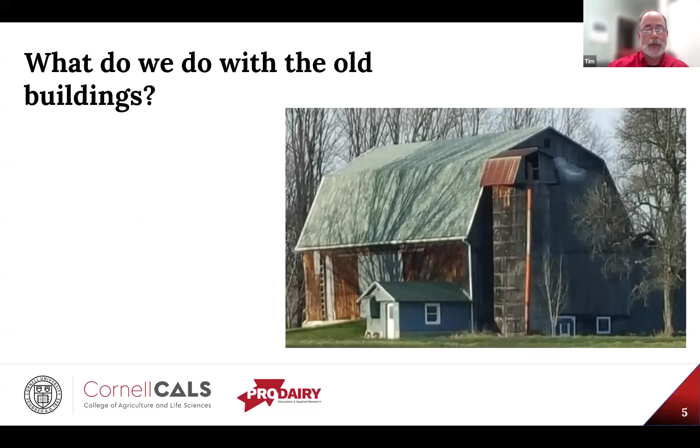Jay Harmon at Iowa State University said it best, and we're talking transition housing. The ultimate goal is to provide a positive environment that promotes the welfare of the sows while providing good animal flow to keep animals and people safe, the ability to observe animals, and provide these aspects in an economical manner.

Now, when we talk about old buildings, what can we do with them? Well, of course, we can raze it - has it outlived its useful life? Is it time to just salvage what we can and put it to rest? This is probably the most drastic choice, but also might be an issue of safety. If the barn has not been cared for properly, it could be a ticking time bomb just waiting for the next windstorm or heavy snowfall.

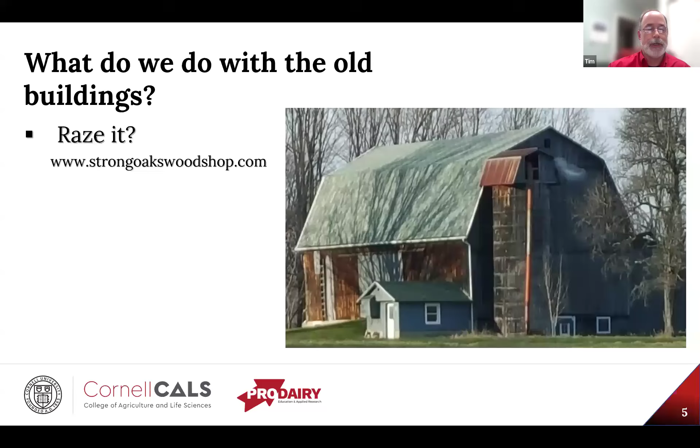Now, if that's the case, there are companies that will buy these - I don't know what they'll pay for them - but they take these old barns down and turn them into coffee tables, bar stools, headboards, you name it. And that might be an option. This is just one example here. I know there are several companies out there. I'm not endorsing any one in particular, just this was an example.

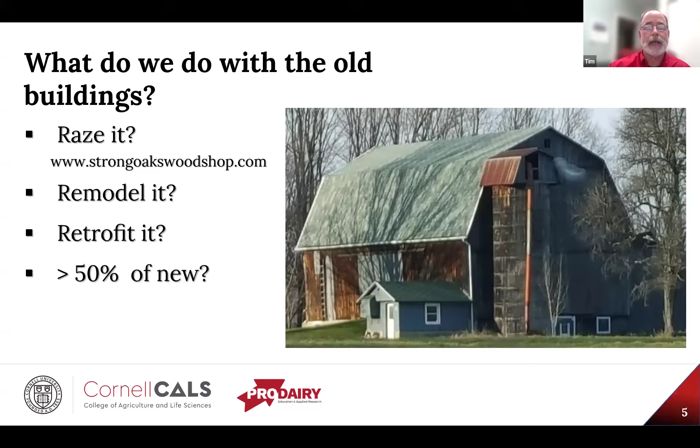Or we can remodel it, which is kind of what we'll be talking about today - upgrade it and be able to use it for a hog operation. We can retrofit it a little bit, update it, upgrade it, and make it more usable for what we want to do. Just remember, if it's about 50%, if it's more than 50% of the cost of building a new one, think long and hard about that. Now, granted, that's kind of a guideline, but if it's more than 50% of what a new one would cost, maybe you want to look more towards the new.

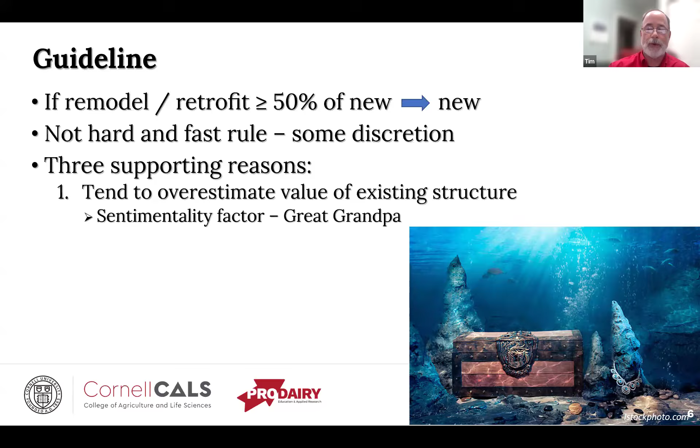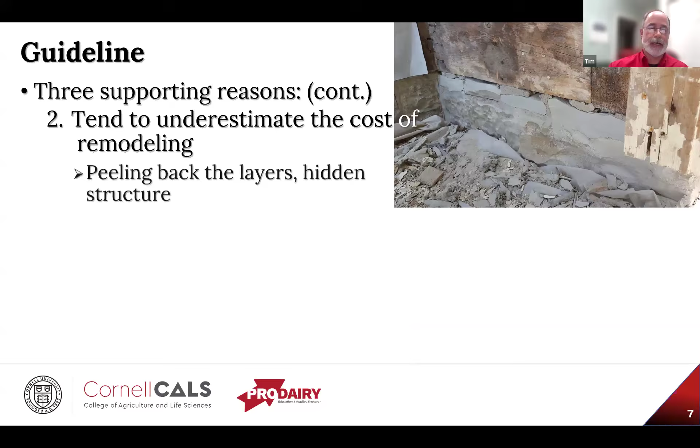Now, that's not a hard and fast rule, and there is some discretion involved. But there are three reasons that support that. The first one is we tend to overestimate the value of the existing structure. Now, granted, there's almost always the sentimentality factor, and it can be very hard to walk away from, let alone raze the building great grandpa constructed with his own two hands from the raw materials he found on site. However, we really need to see this as sunk capital, just as if it was sitting on the bottom of the ocean. It's gone, it's unrecoverable, and throwing more money after it is not a wise use of resources.

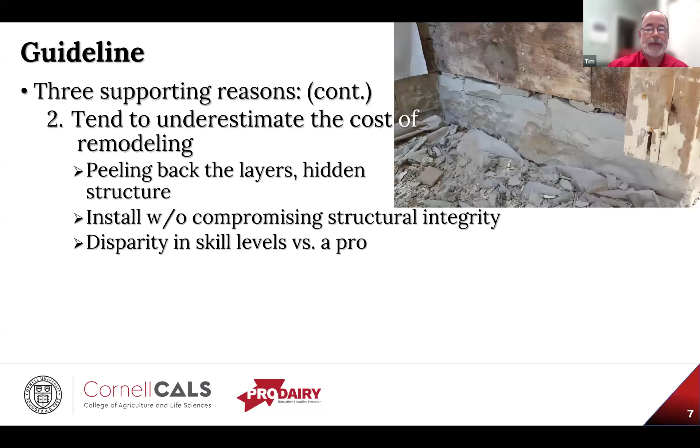Reason number two is we tend to underestimate the cost of remodeling. It's not until we start peeling back the layers that we see the hidden structure, or what may be left of it, and we may not be able to install any new systems without compromising the structural integrity of the facility.

Many may feel they can reduce expenditures by doing it themselves, but they fail to consider the disparity in skill levels between themselves and the guys who do this for a living. Then there's the amount of tinkering required to retrofit 21st century technology into a 19th century structure, and if you're from Eastern New York or New England, that can be an 18th century structure you're dealing with. Then there's the availability of the necessary tools and materials, some of which are required for these new technologies.

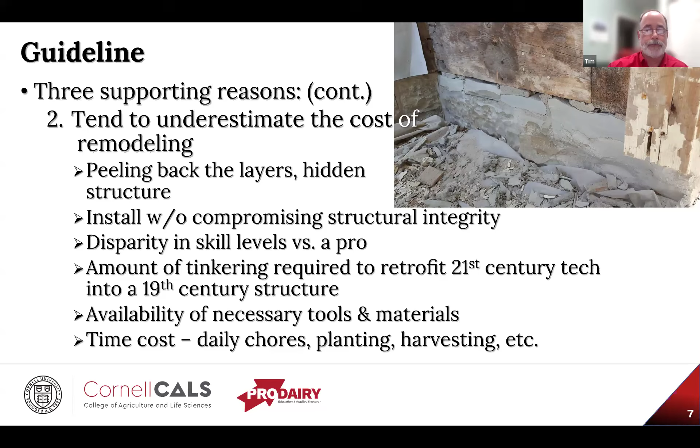If you have to buy a $4,000 piece of equipment just to make all the plumbing connections, and you only have 20 of them to make, it's hard to justify that cost. Whereas a professional is doing this job plus six other jobs, and he can easily spread that cost out over several units. Then, of course, there's the time cost. As the farmer, the best use of your time and talent is doing the daily chores, planting, harvesting, etc., not necessarily swinging a hammer or spinning a wrench.

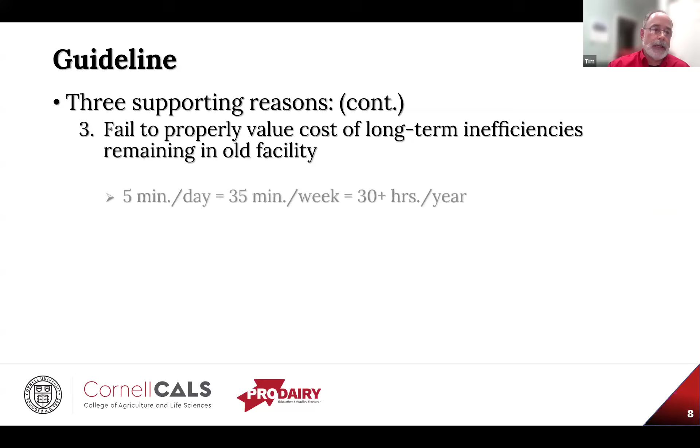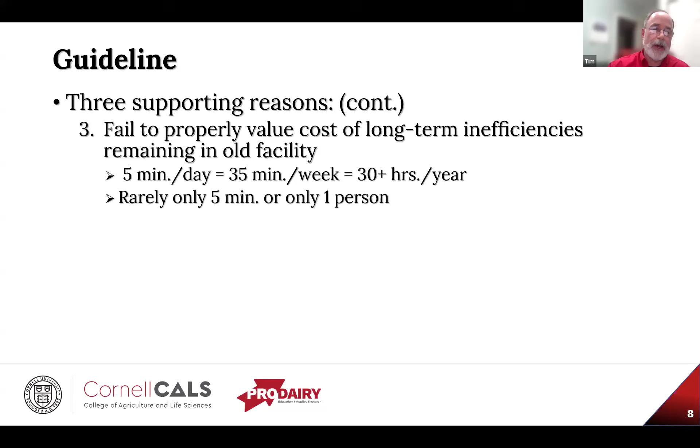The third reason is we tend to fail to properly value the cost of the long-term inefficiencies that are going to remain in the old facility. There's only so much you can do with some of these older buildings. You might argue it's only 5 minutes a day, but that's also 35 minutes per week and about 30 hours per year, almost a full work week, or at least half of one. But rarely is it only 5 minutes or only one person.

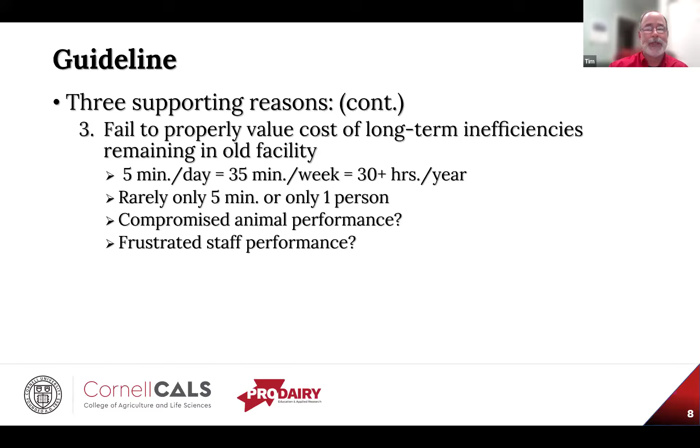Then what about compromised animal performance, where we just can't get the growth out of them we want because there's always somebody with a sniffle, or one section of the barn where the animals just don't do well. As long as we still have that building, you're always going to have that issue. And what about frustrated staff performance? The poor person working in there has hit that low milk line just one time too many, and they'll let you know about it.

So those are the three issues. But the all-important question before we do anything is, how do you want to manage? That must be answered before any designing begins.

For example, stalls: do we want free access, non-gated, or large open pens? How about feeding? Are we going to use feed drops, trickle feed, floor feed, or some electronic feeding, especially with the sows as they start to come into their milk? Then watering - is this going to be water tubs, water troughs, trickle feeders? What are we going to do?

And waste management, how are we going to move the manure in and out of the barn and then out to the field? And how about animal movement? Anytime you move animals, that's a good time to take some measurements on them - what we call KPIs, or key performance indices.

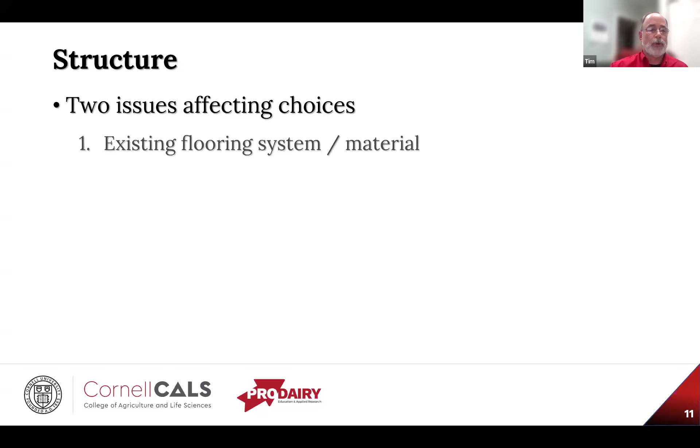Are these pigs growing like we want them to? Are they doubling or tripling their weight from birth to weaning? Once they move from a feeder group to a finish group, what is their weight gain? Try to figure out how we can do this safely and quietly without upsetting the animals, and get the data we actually need, because the goal is to efficiently and effectively use what you have available to arrive at a good system at an economical cost.

So let's talk about structures. There are two issues affecting choices here, and the first is, what is the existing flooring system or material? Well, it could be earthen, which obviously is not recommended, because pigs like to dig.

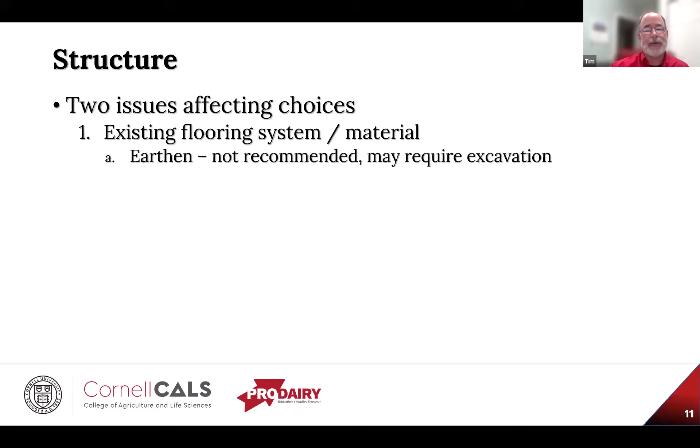That's just a pig being a pig, you can't fault them for being a pig, they just like to dig. And if there's an earthen floor, they're going to be digging everything everywhere and may even upset the foundation that is there. And if this was an old dairy barn, it may have been a run-in shed where they just had heifers or dry cows, and there may be 1.5 to 2 feet of manure in there, and we're going to have to excavate down to some virgin soil before we can do anything else.

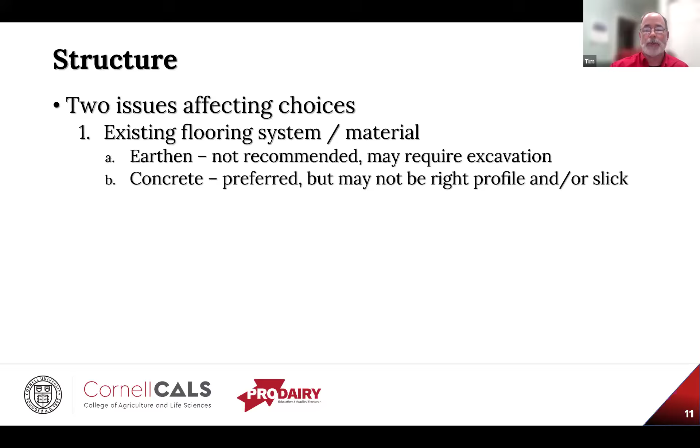Then if it's concrete, that's preferred. But again, this is an old dairy barn, so it might not be the right profile. You may have gutters in there, you may have mangers, things that you really don't need. And the concrete could be very slick, especially if they've been scraping it with a back blade or a skid loader, which can really put a polish on that concrete. That's really the last thing you want when you're moving animals around.

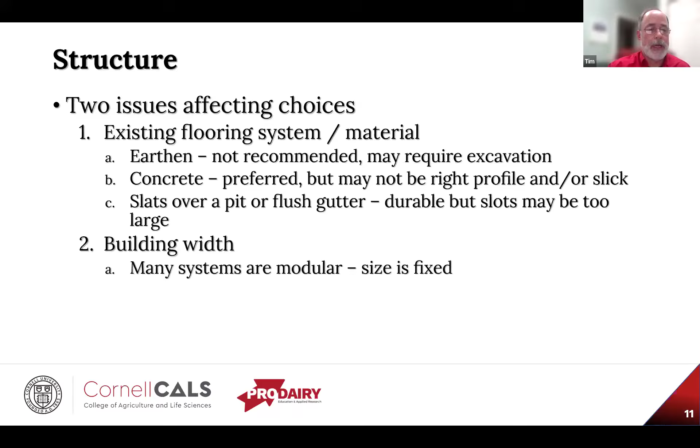And if it's slats over a pit or flush gutter, it sounds desirable and is very durable, but the slots may be for heifers and dry cows, not for pigs' feet. And if the slots are too big, pigs can fall down through those slots and break legs and do other damage that's not very good for the whole system.

The other consideration is the building width. Many systems available today are modular and the size is fixed, so we've got to put these in either in stacks or rows that actually fit within that structure. You need room not only for the system, but for the operator to get in there to take care of waste, put in bedding, take out bedding, give them some feed, change out that feed if it's building up and not doing well, and get a good eye on those animals each and every day.

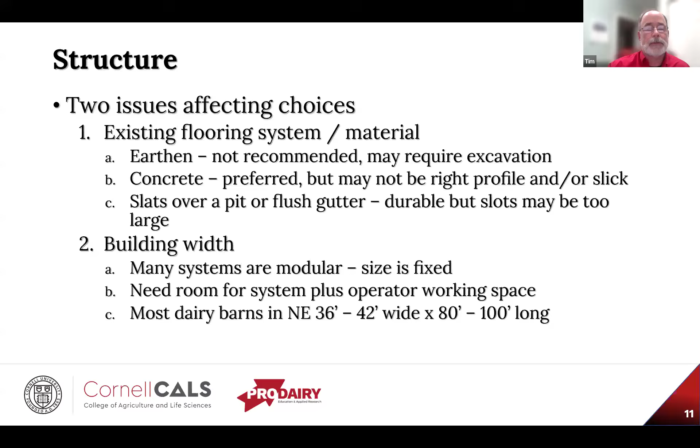Most dairy barns in the Northeast are somewhere in the range of 36 to 42 feet wide and about 80 to 100 feet long, so that gives you an idea of what you might be working with. Those barns are almost always divided into thirds—you've got a third along each sidewall and a third in the middle. Depending on what's available and what system we're trying to put in, that can affect how things are laid out.

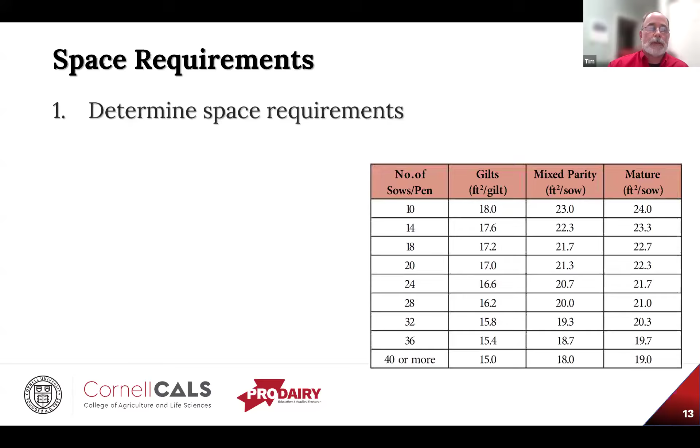Of course, there's space requirements, and that's going to depend on the number of animals in the pen and their age, since age is related to physical size. So we need to determine the space requirements we're going to need in this barn. Animal weight and size figure in there, as well as group size, because as we add more animals, the square footage per animal actually goes down. That's only because there's a bit of a fixed cost, so to speak, in terms of space—that minimum space is now spread over more animals, so we don't need as much space per animal.

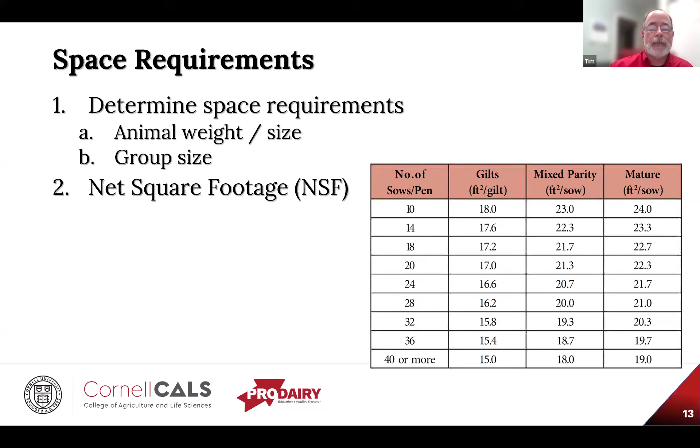And we're always talking net square footage—in other words, the area that the animals are actually going to occupy. So we can't figure into this number the alleyways, scrape alleys, feed alleys, things where the animals do not normally reside.

We also have to take into consideration dynamic versus static grouping. In other words, are we moving animals in and out of this group, or is the same group staying together and being moved through the system? What happens with a dynamic system, where you're bringing animals in and out, is there's always that pecking order that has to be rearranged every time you put new animals in. Even taking animals out will cause a shuffling of the pecking order. If we can keep them static, we don't need as much room, because we won't have the new ones trying to get away from older ones, or ones that just have it in for them.

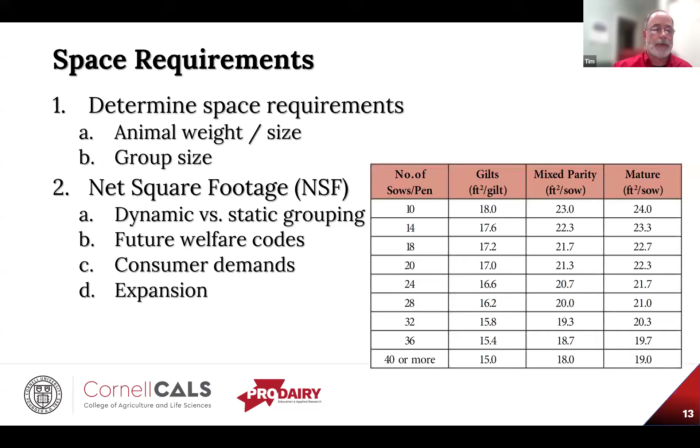We have to consider any future welfare codes that may come along, and these usually arise because of consumer demands—that's where the FARM program started. Consumers were saying, hey, we want a product, but we want to know that the animals producing that product are being cared for properly, and that's where the FARM program came from.

Then, of course, we always want to leave room for expansion, either for the next growth spurt or for the next generation, but we always want to leave that expansion. We never want to build ourselves into a corner.

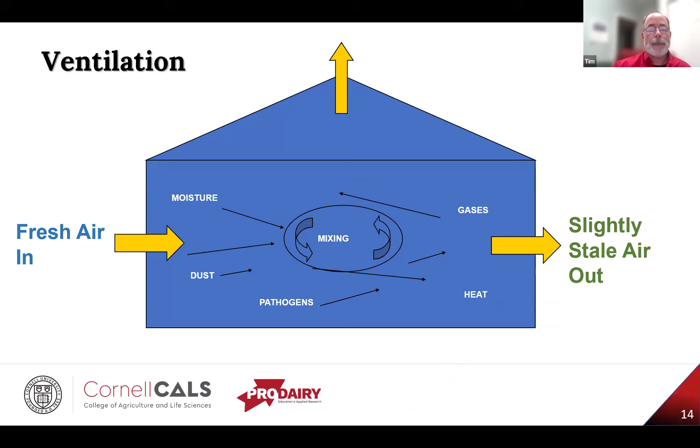Now, we need to ventilate not only for the livestock, but for the barn as well, and we want sufficient air exchange so it's only slightly stale air going out. If you're smelling ammonia or a very strong pig smell, we probably aren't getting enough air through that system.

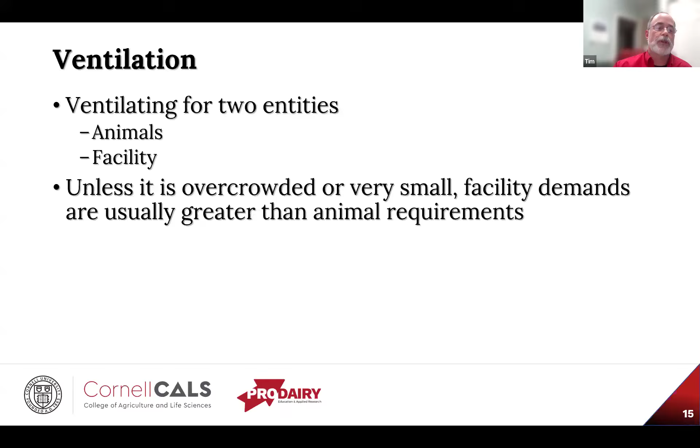Like I said, we're ventilating for two entities, the animals and the facility. Unless it's overcrowded or a very small facility, the facility demands are usually greater than the animal requirements. Now, animal requirements are usually figured on CFM, or cubic feet of air moved per minute.

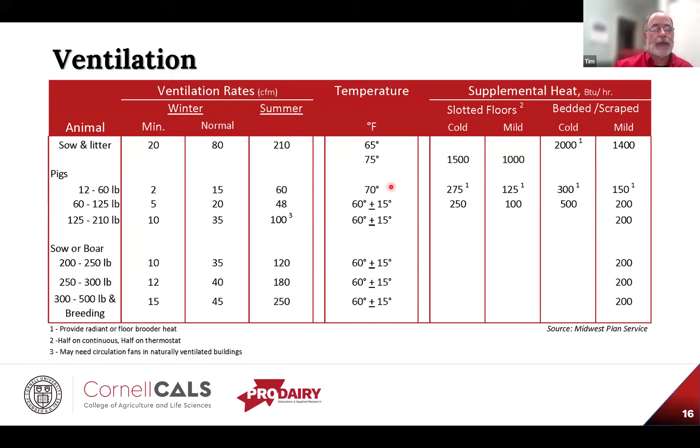And that varies with winter or with the season as well as the animal size and age. You can see what the ranges are. These are all CFM, cubic feet of air per minute being moved either during the winter or during the summer. And these are our target temperatures that we want to reach. This is kind of the comfort area. Sometimes, just because of the size of the animal or type of facility, we have to add a little extra heat. This is in BTUs per hour that we need to add to that building just to keep it up at this temperature.

When we're dealing with large ruminants, usually this is not an issue because there's so much heat generated with those animals, that's not a consideration. But we definitely want to hit that sweet spot, that nice comfort zone.

And you can see that comfort zone changes according to body weight, and that comfort zone is based on temperature. Now, if it's less than that, the animals are under cold stress, which means they're going to be burning calories to stay warm instead of to grow and to flourish.

And if it's heat stress, kind of the same thing happens. What happens here is they're spending some energy to try and cool themselves, so they may be panting or doing other things. But also with heat stress, just like you and me, when it's hot out, we don't want to eat much. So if they're not taking their groceries in, they're not going to grow. So we want to aim for that comfort zone.

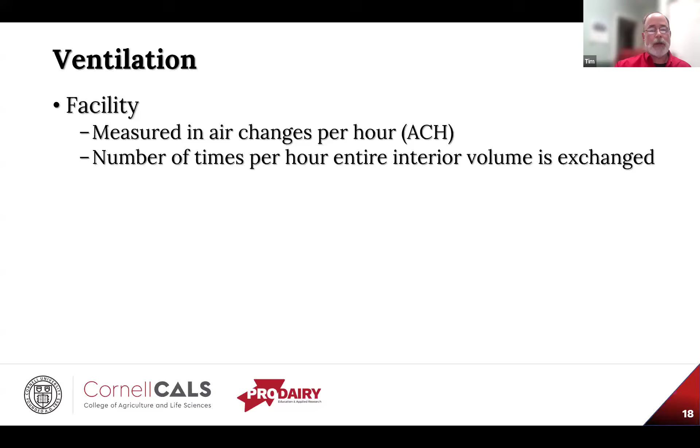Now, the facility, that's measured in air changes per hour. That's really the number of times per hour the entire interior volume is exchanged. In other words, we're moving everything out and bringing new fresh air in every so often. And those numbers for the winter, we're talking 4 to 6 air changes per hour. So about every 10 to 15 minutes, we're completely changing that air in there, and that's to keep the animals healthy.

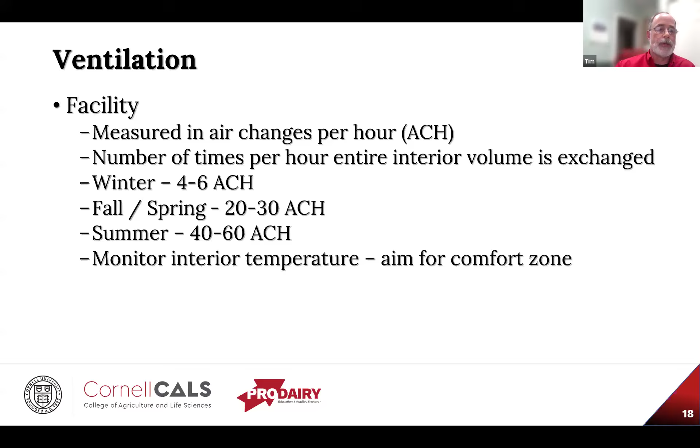The fall and spring, we have to ramp it up a little bit because it is a little bit warmer. So about every 2 to 3 minutes, we're changing that air. And then in the summer, we're looking about every minute, minute and a half, we're changing everything. So yes, that's going to take quite a bit of fan horsepower to do that.

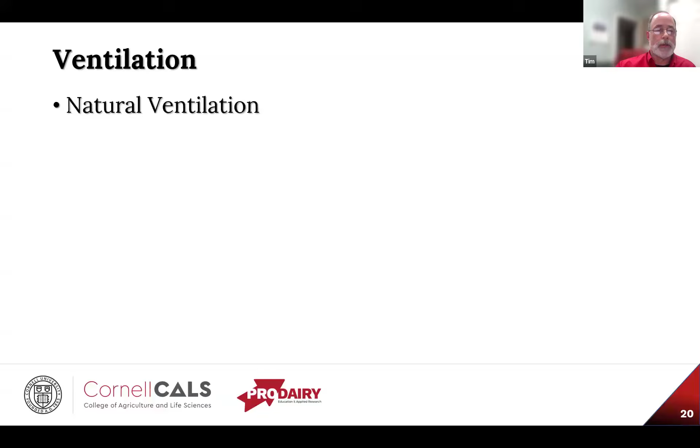And we want to monitor that interior temperature, and again, aim for that comfort zone. That's where we want to be. That's where the animals are going to be the healthiest. Performance is going to be best.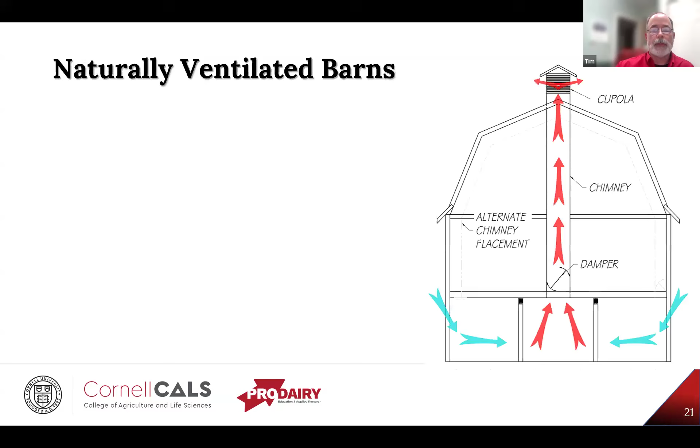Now, there's a few options in terms of ventilation. We can have natural ventilation, where we rely on Mother Nature to do most of the work. We have negative pressure, where we're trying to draw the stale air out and therefore draw fresh air in. Or we can use a positive pressure system where we're pushing fresh air into the building.

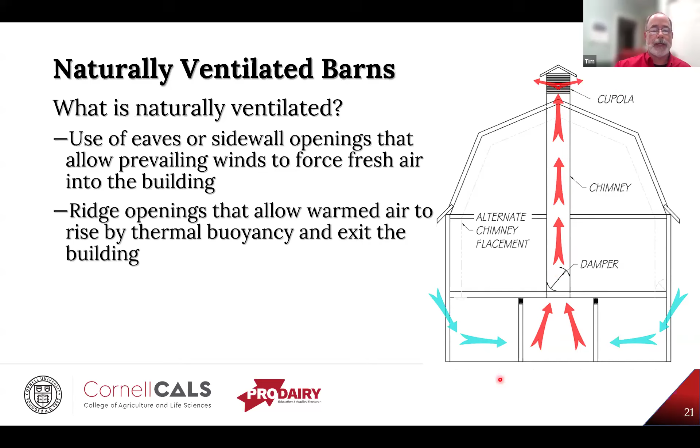And what that might look like when we're talking naturally ventilated barns: we have big openings on the eaves or side walls that allow the prevailing winds to force fresh air into the building. Then by natural buoyancy, in other words, warm air rises, cool air falls, we have a ridge opening, maybe a cupola. This air rises through there and goes out, and as it rises, it creates a void, so now fresh air comes in.

Unfortunately, wind is usually a greater factor than buoyancy, especially in the winter. It's not so much a problem in the summer. However, in the summer, you do have temperature inversions where inside this barn it can be much cooler than it is outside. So the fresh air doesn't want to come in because it's warmer, it can't come in. We've got this heavier, denser, colder air that's, relatively speaking, like jello compared to the air that's outside. So when we have these inversions where it's cooler inside than outside, we can have a ventilation problem.

And because we're bringing all this air in, this tends to be a cold facility, which means it's going to be within 5 degrees one way or the other of what's outside.

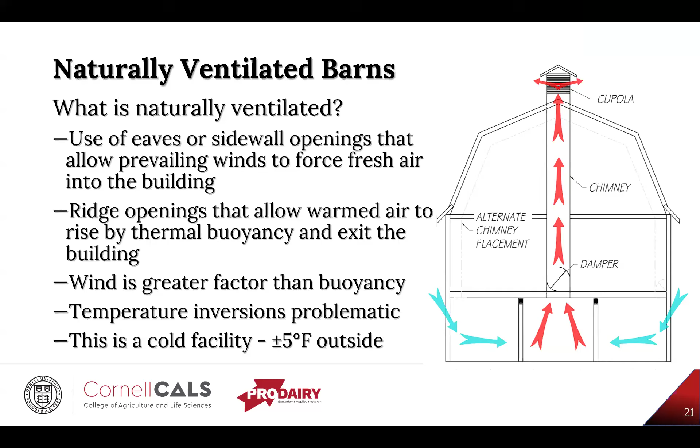That's where the supplemental heat comes in. With the small ruminants, there's usually enough heat in that barn produced by the animals to keep things above freezing. With pigs, that's not necessarily the case, so that's why we have to add supplemental heat in order to keep the animals within that comfort zone, but also keep the barn from freezing.

Yes, we run into that issue in our own barn, and a lot of it is either supplemental heat or having enough animals in the barn that their body heat keeps things thawed out.

And then we have it's not a question but a comment, just talking about weights for mature sows and boars. To that participant, I would just say it depends on breed and management style. Some people feed less just to ensure that their sows and boars aren't getting too big, but still meeting all their nutritional requirements. So it certainly varies, but they can get up to that 1,000 pound mark for sure.

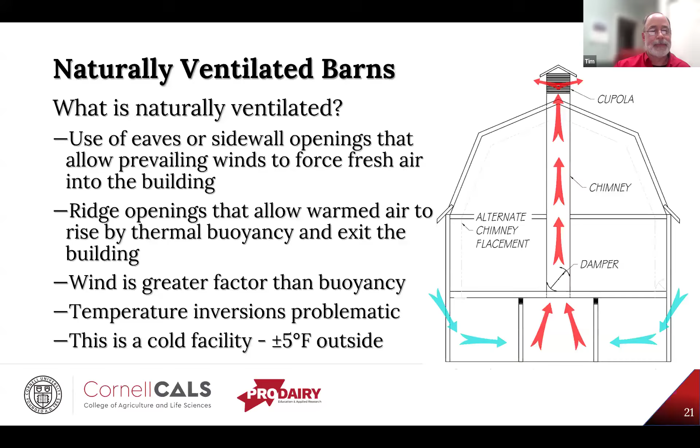That's all for now, Tim. Yep, and that's why you have those key KPIs so that you can monitor that. You can't measure it if you don't monitor it. Going back to my farm economics days, you can't manage it if you don't monitor it. So if you're looking to hit a certain target and you're not weighing them during those KPIs, you're going to overshoot or undershoot them.

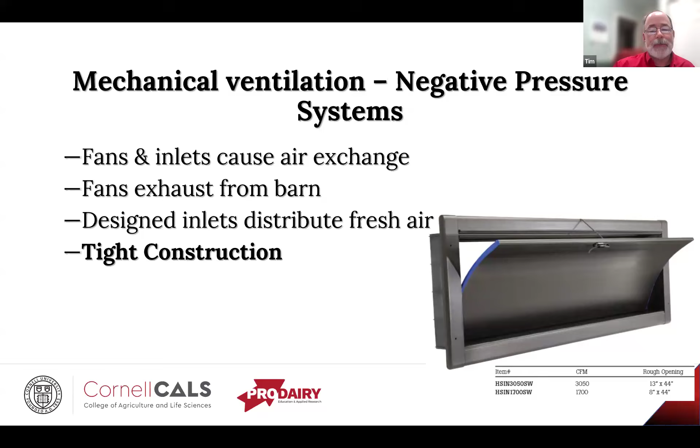So back to the ventilation systems and mechanical systems. We're talking about negative pressure systems here. It's the fans and these appropriately sized inlets that cause the air exchange. The fans exhaust the air from the barn, and these designed inlets distribute the fresh air. These are specifically sized and placed based on the fans that you're using. But in order for this to work, we have to have tight construction, so that might be an issue in some of these older barns.

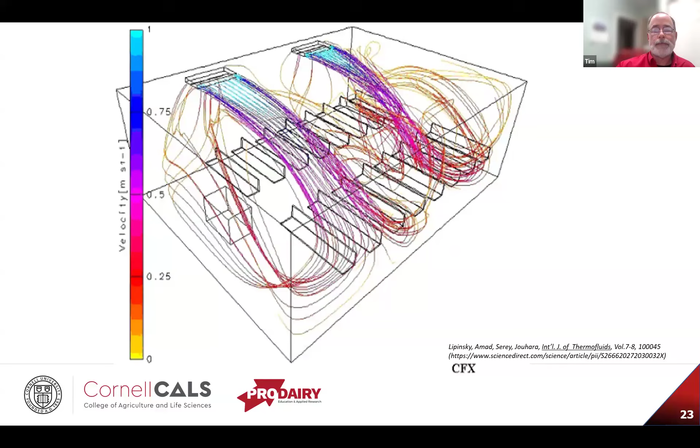And we can see this would be a negatively pressured system. Maybe we have a fan somewhere along this wall here. We've got these designed inlets, and the air is coming in at a velocity that it's getting good mixing. As it comes in, it's going to slow down a little bit and mix with the air that's already in there, scoop up all the nasty stuff that might be in there - the dust, the dander, the moisture, gases, pathogens - and then that eventually finds its way out of the barn.

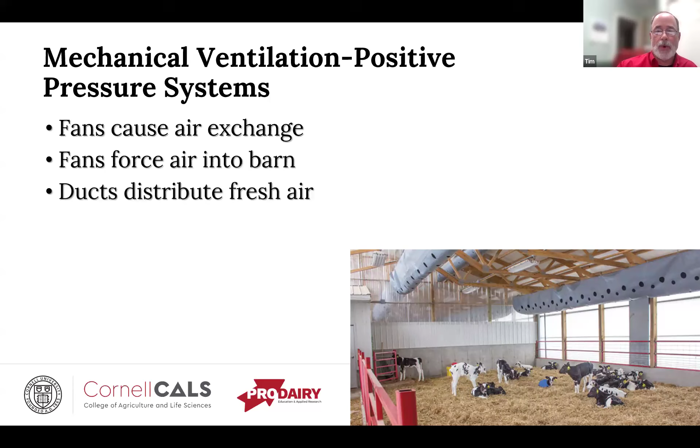Now we're talking positive pressure systems. The fans cause the air exchange because they force air into the barn. We usually do this through ducts, or the technical term for this would be a diffuser, which just helps distribute the air uniformly throughout the barn.

Now it does require some outlets, and we usually figure a minimum of 2.5 square feet of outlet per 1,000 CFM of fan capacity. We need that, otherwise there could be a back pressure on the system, which will significantly decrease the performance.

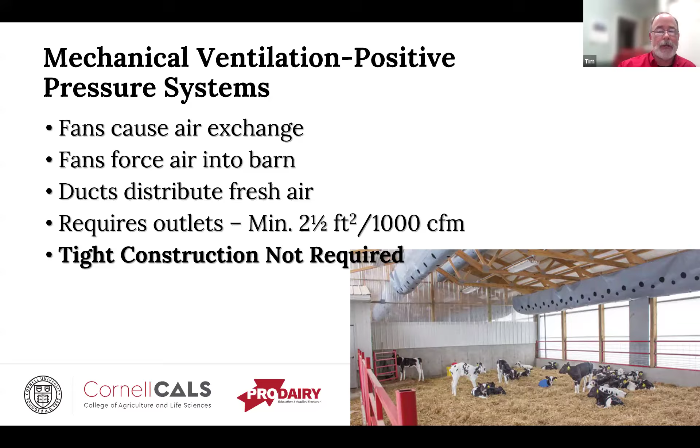And this is usually the best choice for retrofit in an old building, because tight construction is not required. If you walk into some of these old buildings, there's more than enough holes for the air to get out, so this tends to be a much better choice rather than the negative pressure system.

Tim, we then have another question, sorry, about ventilation. That's all right. Would you say that the tubing that's used in dairy barns for ventilation would not be sufficient for pigs as well? It depends on what's already in there and what it was sized for.

Again, usually we're trying to ventilate the building more than we're ventilating the animals. So as long as we're providing those 4 to 6 air changes in the winter and those 40 to 60 air changes in the summer, it doesn't matter if it was designed for cattle versus pigs, as long as we're getting that ventilation and we're more than meeting the CFM per head as far as the animals go. Does that make sense?

Makes sense to me. Okay, that's it for now. Not a problem.

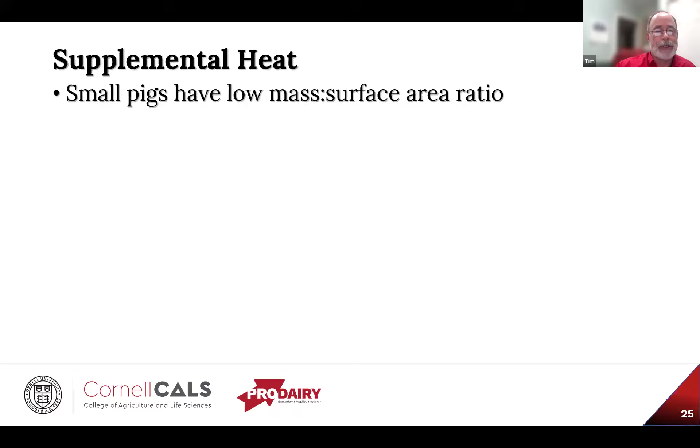Back to the supplemental heat. Part of the reason we have to provide that is small pigs have a low mass to surface area ratio. In other words, you've got this little tiny furnace with a lot of exposure. It's not like a 200 or 300 pound sow where you've got a pretty good massive animal with an operating digestive system and relatively less skin proportionally.

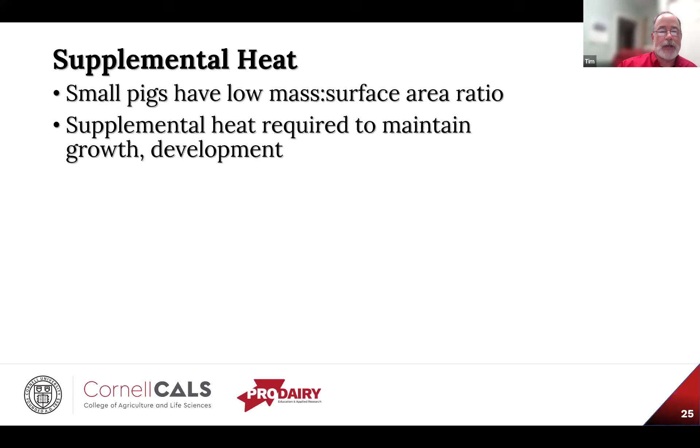So the supplemental heat is required to maintain growth and development. Just like I said before, we like to have that hit right in that sweet spot. Above it or below it, we're thermally stressing those animals and they're not going to grow as well, perform, or be as healthy.

Now there's lots of options to consider. What you want to think about is, of course, the initial and operating costs. What's it going to cost to get it in there, and what's it going to cost to operate it? What's the service life? Is this something where every 6 months you're going to have to be replacing a bulb or replacing the element? How much of an area is that going to cover?

It's not a problem for a heat lamp to cover a small brooder area, but when you're talking about a large feeder pen, you're going to need something with a little more power than that.

And then safety, especially when we're talking about some of these space heaters. When they're burning propane, the natural products of combustion are CO2 and water. Not a big deal, we just have to get rid of it. However, if it becomes fouled or otherwise not performing like it should, then we've got carbon monoxide, and that obviously is a problem. So that's something we need to look at.

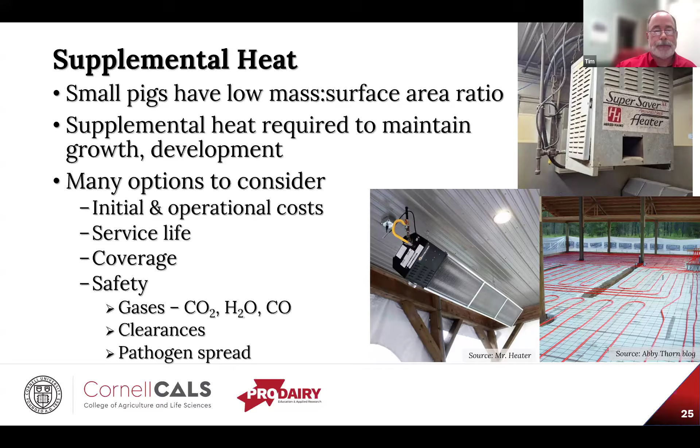The other thing, especially when we're talking about some of these space heaters, is the ease at which pathogens are spread. Hey, this one group at one end of the barn has the sniffles in the morning, and by night everybody in the whole barn has the sniffles, because it's just taken that air, warmed it up a little bit, and spread it around the whole facility. So that's something you might want to consider.

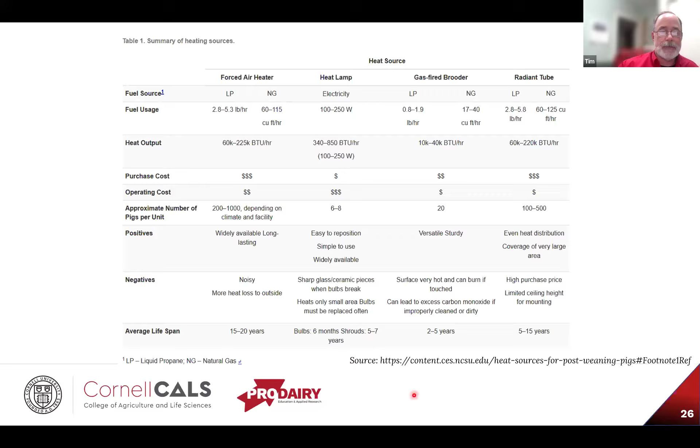We look at the positives versus the negatives, and again, of course, the average lifespan. Something may cost more initially, but if you can amortize that over 15 to 20 years versus 6 months or 5 years for the shrouds, what's going to be the better deal for you?

And the lighting—there are lots of options here too. You might have some incandescent bulbs. Yeah, these are probably just leftovers because they don't make them anymore. Fluorescent aren't bad, they're fairly efficient, a lot more than incandescent.

However, they're not cold tolerant, so if this barn is below 40 degrees or so, these fluorescent lights don't turn on very well. And when you're talking CFLs, it's pretty much the same thing. But again, what's the availability of those now?

We used to have the old mercury vapor lights, which gave a very bright white light, but they were slow to turn on, and now there are no ballasts being manufactured for the last 17 years or so. So to be able to service these, it's not very likely.

We do have high pressure sodium, which operates very similarly, but again it has that pink orange color to it, which gets you a color rendition in the barn a little funny. And again, like the mercury vapor, they tend to be a slow start. Very efficient, but very slow start.

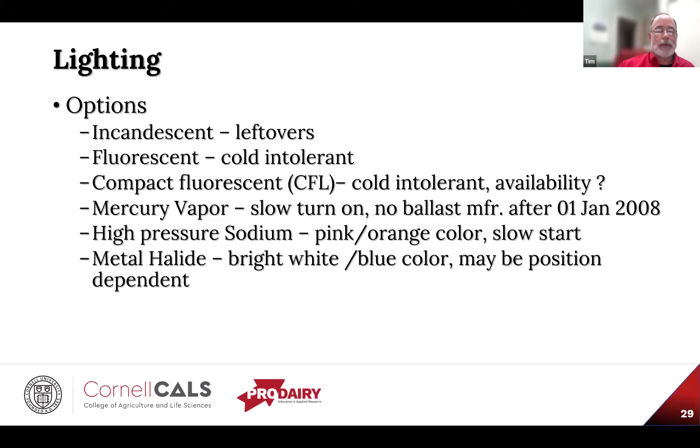The other issue with position is some of these bulbs have to be base up or base down, or they can't be base horizontal. So you have to look at, all right, how are we going to install these? What's the application here? Are we going to have to turn these upside down or sideways or some other such thing? And if we do that, are the bulbs going to work?

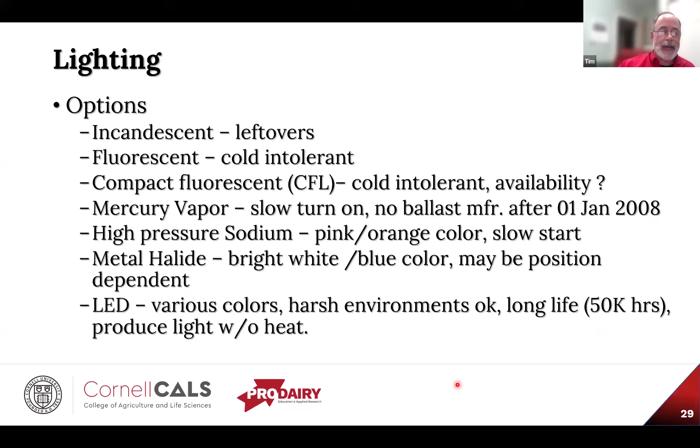Probably the best choice is LED. Now these come in various colors, and by colors I mean different whites. Some can be very warm white, others can be a very bright, almost that bluish white, which is great when you're talking task lighting. They're supposed to have a very long life, although I've changed enough of these in my life, I don't think I've made the 50,000 hours. But they do produce a lot of light without heat, or very little heat. But again, you're looking at that little diode that's maybe a quarter inch in diameter.

So how bright do we want these barns? Well, generally speaking, for the majority of the barn, usually about 20 foot candles is sufficient. You got to remember when they built a lot of these barns, milking was being done by lantern or candlelight. So there's not a lot of light coming there, but it allowed them to do it. And it's enough to get you back and forth in the barn to see where things are, see what animals are up and moving around.

To give you a little better perspective, think of it as a cozy living room. It's bright enough that you can read a magazine, which I say magazine, I'm probably dating myself. But unless you're sitting right next to the light, you're probably not going to read your favorite James Michener or Janette Oke novel.

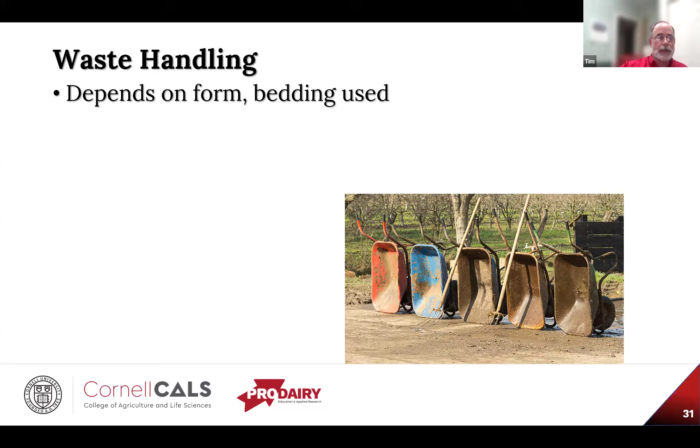However, then there's task lighting, and that's 50 foot candles, and that's more like a well-lit office space. Again, you're going to be able to see detail, especially things like markings on a syringe body, so that you know you're giving the right dose for that size animal. And you'll be able to see abnormalities on animals, or at least be able to diagnose or pick out animals that are not doing well.

And we move on to waste handling. Well, of course that's going to depend on the form and the bedding used. It might be more or less liquid, it might be semi-solid, it might be solid. Again, how do you want to manage it? The existing gutter and barn cleaner in some of these barns may work, but if the drive unit has been sticking out the side of the barn exposed to the weather for a couple decades, probably not, and you may or may not be able to get parts for it.

But really, mechanical cleaning is imperative. Be able to plan for that, whether it be something—fork and wheelbarrow gets old really fast. So some things you might want to think about is, hey, can we get a skid loader in there and be able to clean things out? Or maybe some of these smaller compact bucket tractors. They can't handle a lot at one time, but it's a whole lot better than breaking your back and getting blisters on your hands forking the stuff out.

Then we have to figure on drainage for washing because we're going to want to wash between groups. And when I say wash, one thing we don't want to do is power wash, because all that does is weaponize all the bacteria and dirt and whatnot in the barn. When you hit that with a 2,500 to 3,000 psi wand, yeah, that's going to move a lot of manure off the walls and whatnot, but where is that going to go? A lot of it gets volatilized, and if there are animals still in another portion of that building, they're going to be breathing it in. So unless you're doing all in, all out on a particular building, don't figure on power washing.

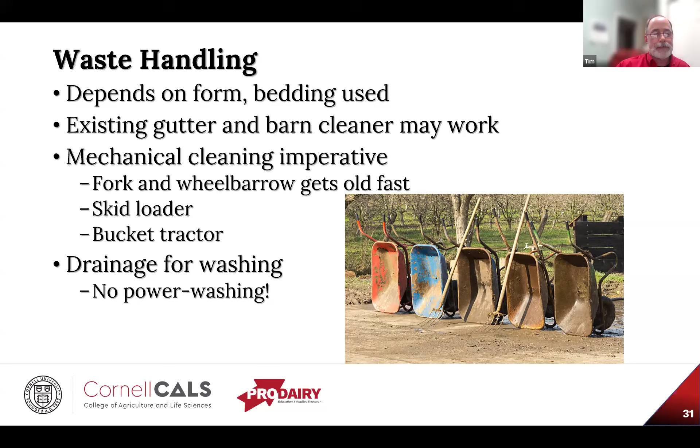Steam washing is a little bit better, but still the pressure there can volatilize a lot of that stuff. You're better off with a garden hose and house pressure, maybe a scrub brush, a little elbow grease.

Now, as we look at some of these old dairy barns in cross section, this is probably what you're going to see. Center alleys, probably 7 or 8 feet wide, with an existing gutter, 7 or 8 inches deep on this side and 10 to 12 over on the stall bed. So the stall bed sits a little higher than the center alley. That was so if the manure channel, the gutter, got too full, it would spill out into the center alley before it would back up onto the stall bed.

There's usually a recess in here. They call it the toe hold. The old timers figured that helped the cow stand up, get a little bit of footing on her front end so she could hike her back end up.

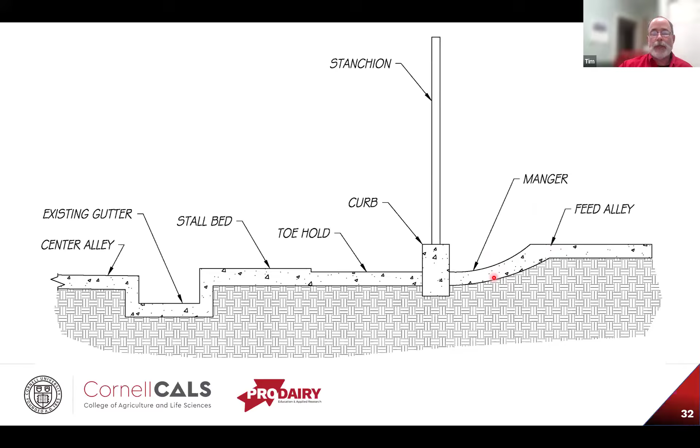In here too, we've got a curb and then a stanchion is usually poured into the curb. And in front of the curb is the manger, and it's usually recessed. The idea was that as the cows ate, the remaining feed would find its way down here into reach, so you didn't have to do as much sweeping in. But we do have a feed alley, kind of elevated up here. You go along with the silage cart or the wheelbarrow and feed them silage, feed them grain, do what you needed to do. So this is what you're usually looking at.

Here's one option that we could do. We remove the curb, we remove the stanchion and the old manger. Come back in, fill it in with sand or compacted fill, and then pour a new slab over top of it, matching up with the saw cut here at the feed alley. You'll probably want to dowel this in to make sure it doesn't move, and dowel it in down here too so it bites into the existing structure.

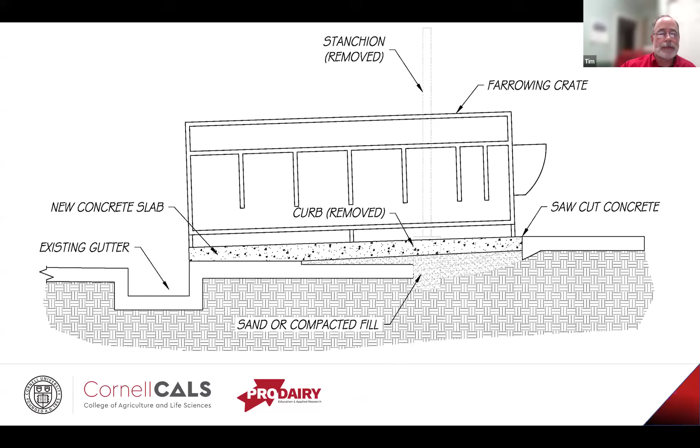Here we can continue to use the existing gutter, and that works great, especially if this is a farrowing crate, because the sow is going to have her head up here. She's not going to be able to turn around. And the way sows are plumbed, everything comes out the back end, so it all ends up in the gutter. And if we can get that gutter working, that's all the better.